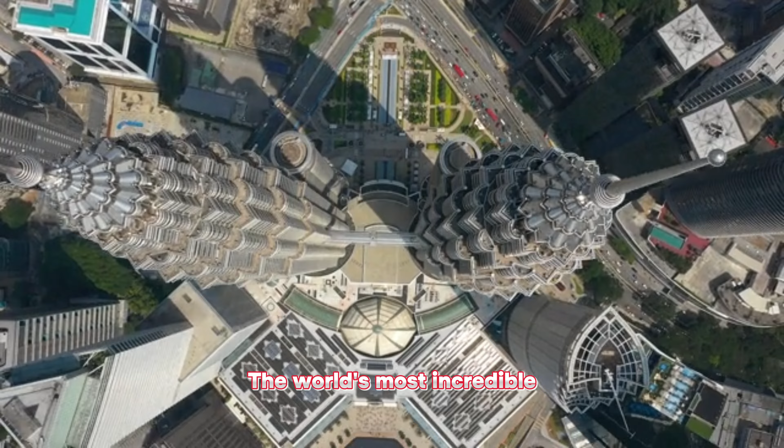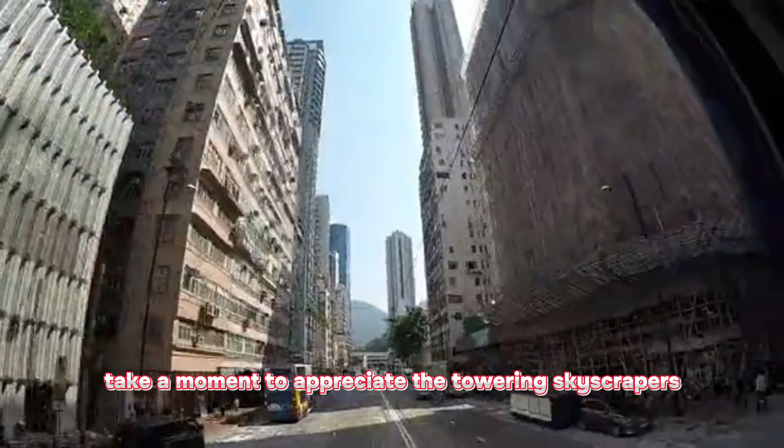The world's most incredible structures are coming together to form a three-dimensional masterpiece. Look around you. The next time you walk down a street, take a moment to appreciate the towering skyscrapers, robust bridges, and bustling tunnels that surround you. These architectural marvels are more than just aesthetic focal points. They are testaments to the brilliance of structural engineering. In this video, we're going to explore the fascinating world of structural engineering and how it is the backbone of modern cities. So buckle up, because we're about to embark on a journey that will reveal the secrets behind the structures that shape our urban landscapes.

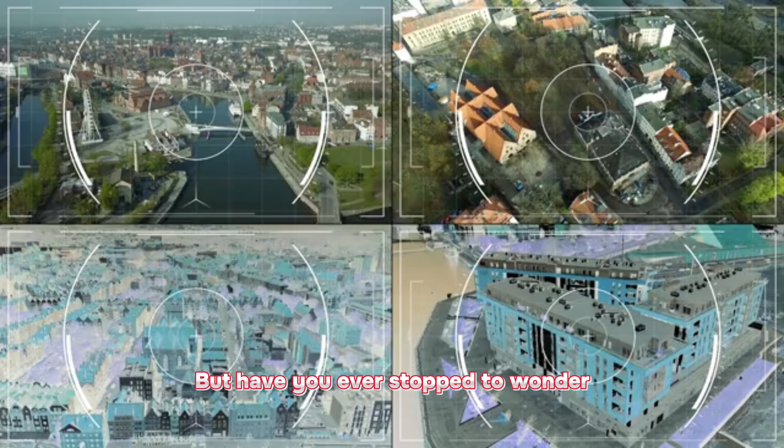Skyscrapers to sidewalks, a world built on foundations. Let's imagine a city as a giant puzzle. Each piece, from towering buildings to bustling streets, is carefully interlocked. The buildings stand tall, housing offices and residences, while roads and sidewalks wind through the urban fabric, connecting people and places. But have you ever stopped to wonder how all these components fit together so seamlessly? How are these structures stable and safe?

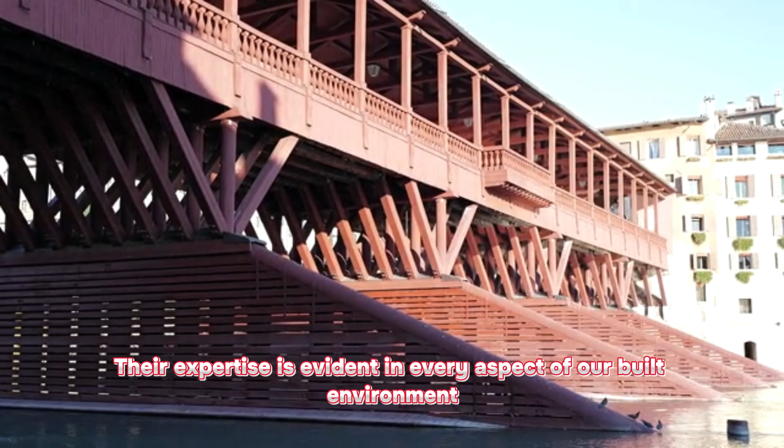The answer lies in the field of structural engineering. Structural engineers are the masterminds behind the scenes, ensuring that every element of a city's infrastructure is not just functional, but also resilient and long-lasting. Their expertise is evident in every aspect of our built environment, from the foundations that support our homes to the bridges that carry us over rivers and highways.

Unveiling the science, the principles of structural engineering. At the heart of structural engineering lies a fascinating blend of science, mathematics, and problem-solving. Let's uncover some of the fundamental principles that govern this captivating field.

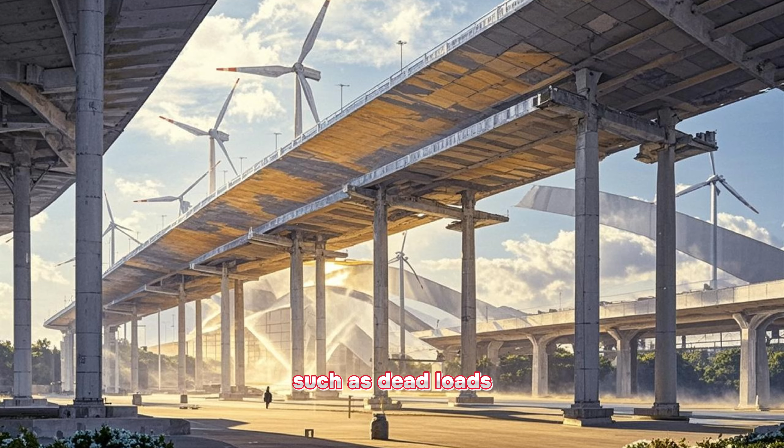Load distribution. Every structure, whether a towering skyscraper or a humble residential building, must be designed to withstand various loads. Structural engineers analyze and calculate the forces that these structures will experience, such as dead loads, live loads, wind loads, and seismic forces. By understanding how these loads are distributed, engineers can design structures that are stable and resistant to collapse.

Stress analysis. When forces act on a structure, they create internal stresses within the material. Structural engineers employ their knowledge of stress and strain to ensure that these forces remain within the material's capacity. Through meticulous calculations and simulations, they determine the appropriate dimensions, material strength, and structural integrity to withstand the expected loads without failure.

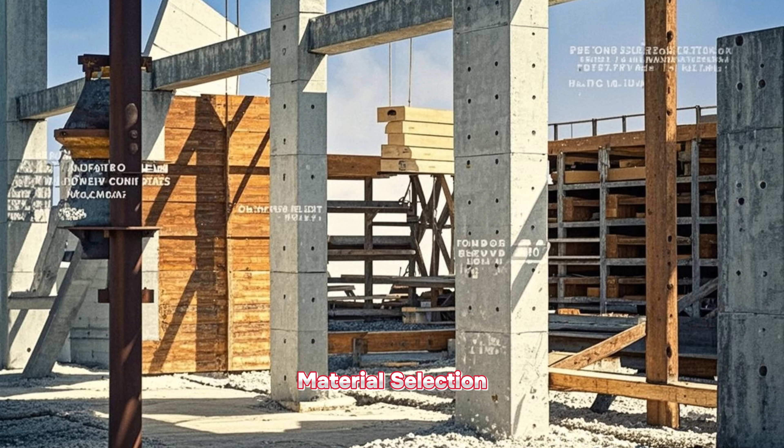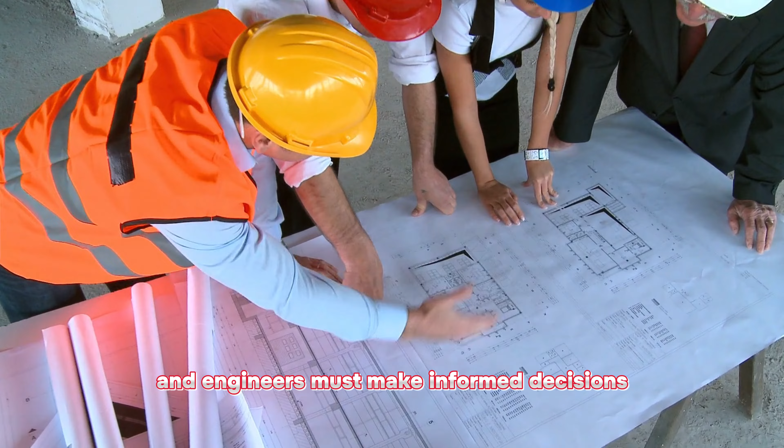Material selection. The choice of materials plays a crucial role in the durability and performance of any structure. Structural engineers consider factors such as material strength, elasticity, durability, and sustainability when selecting the right materials for a project. Each material has unique properties, and engineers must make informed decisions to ensure that the structure is both safe and cost-effective.

Engineering innovation. Shaping the future of urban design. Structural engineering is not just about following established principles. It's also about pushing the boundaries of innovation and exploring new frontiers. Let's delve into some of the exciting ways structural engineers are shaping the future of urban design.

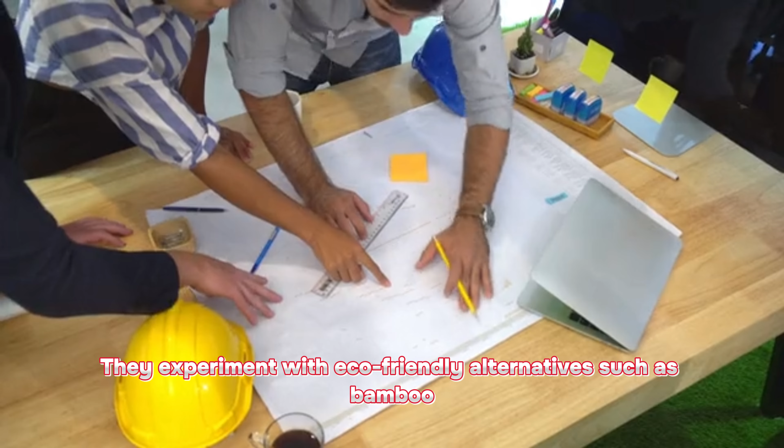Sustainable materials. As environmental concerns grow, structural engineers are at the forefront of incorporating sustainable materials into their designs. They experiment with eco-friendly alternatives such as bamboo, hempcrete, and recycled materials to reduce the carbon footprint of structures while maintaining their strength and stability.

Smart buildings. The integration of technology in structural engineering is transforming the way buildings are designed and constructed. Smart buildings can now adapt to changing conditions, monitor their own structural health, and respond to occupant needs in real time. Structural engineers play a vital role in developing and implementing these cutting-edge technologies.

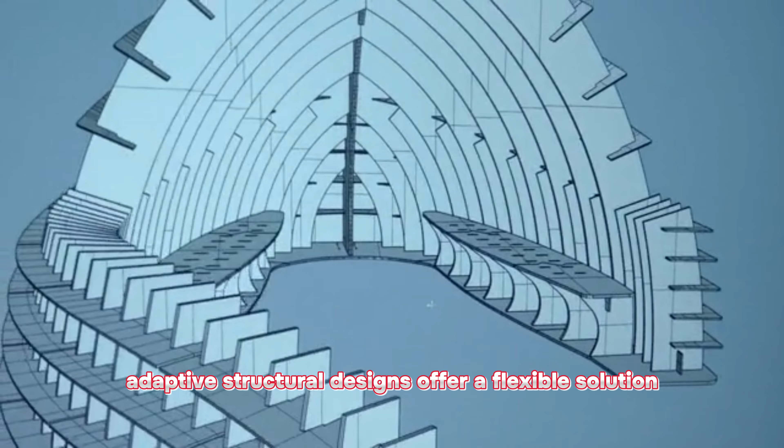Adaptive designs. In an era of evolving demands, adaptive structural designs offer a flexible solution. These structures can be modified and reconfigured over time to accommodate changing requirements. Structural engineers are incorporating this concept into their designs, creating buildings that are not just adaptable, but also resilient and sustainable.

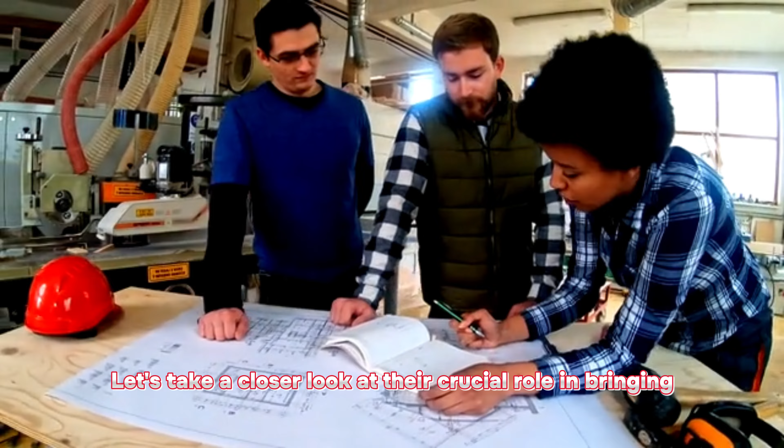From blueprint to reality. The role of structural engineers. Behind every iconic structure and functional piece of infrastructure lies the dedication and expertise of structural engineers. Let's take a closer look at their crucial role in bringing our built environment to life.

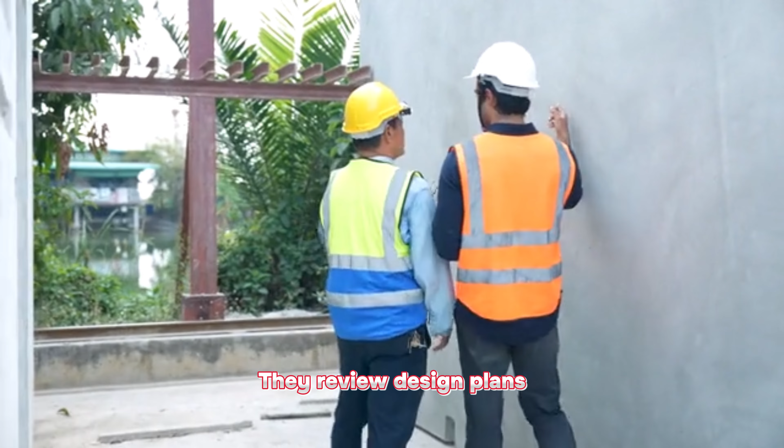Structural engineers work in close collaboration with architects, contractors, and other stakeholders to transform designs into reality. They review design plans, conduct site visits, and perform detailed calculations to ensure the structural integrity of a project. They use specialized software to create structural models, analyze loads, and simulate various scenarios to assess the stability and safety of a structure under different conditions.

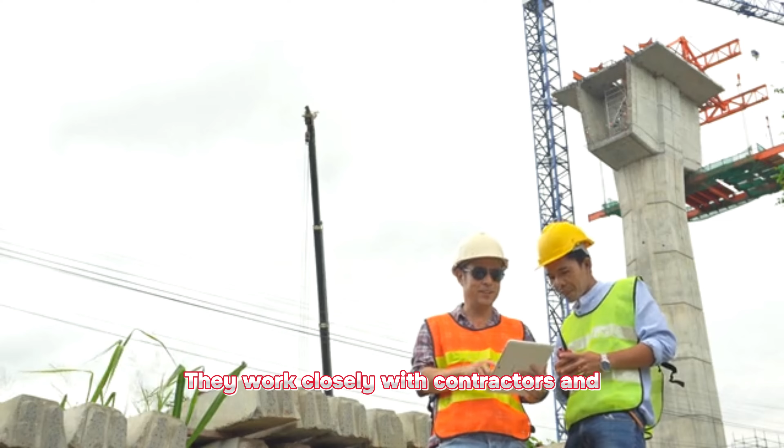Structural engineers also develop detailed drawings and specifications that guide the construction process. They work closely with contractors and construction teams to ensure that the structure is built in accordance with the design plans and safety codes.

A world without limits. The future of structural engineering. As our cities grow and evolve, so does the role of structural engineering. Let's explore some of the exciting possibilities that lie ahead for this dynamic field.

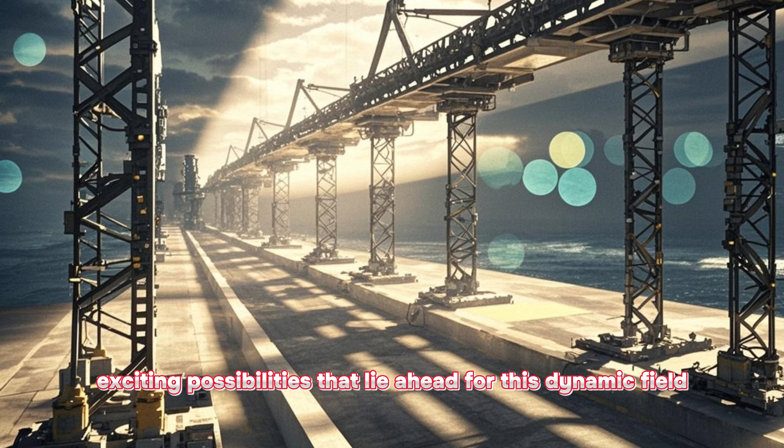Urban renewal. As cities undergo revitalization projects, structural engineers play a key role in assessing, strengthening, and retrofitting existing structures to meet modern standards and enhance their longevity.

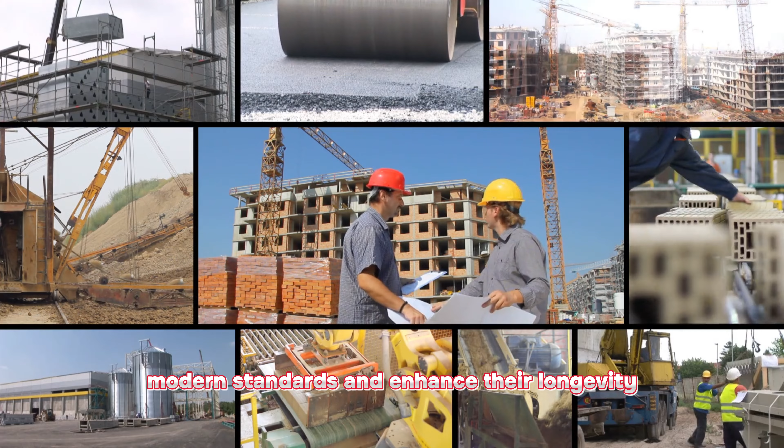Vertical cities. With growing populations, cities are expanding upwards. Structural engineers are at the forefront of designing innovative and sustainable solutions for high-rise buildings, including advanced foundation systems, efficient load-bearing structures, and advanced construction techniques.

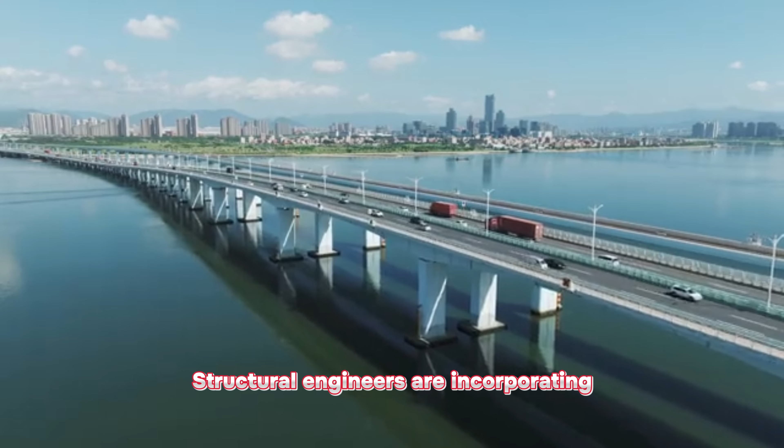Sustainable infrastructure. The demand for sustainable infrastructure is on the rise. Structural engineers are incorporating green design principles into transportation systems, water management structures, and public works projects, minimizing the environmental impact while ensuring functionality and durability.